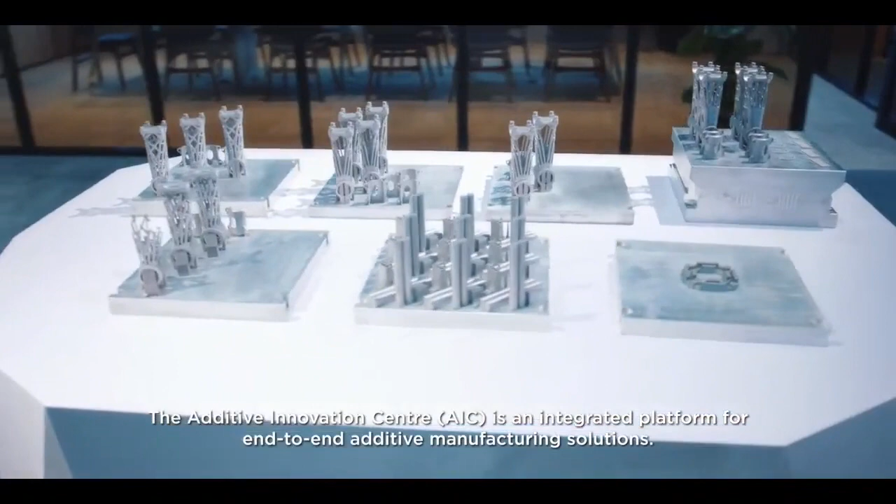The Additive Innovation Center is an integrated platform for end-to-end additive manufacturing solutions. AIC was designed to be the nerve center for additive manufacturing technologies and innovations, allowing industry partners to meet up and brainstorm on problem statements that are unique to their business needs.

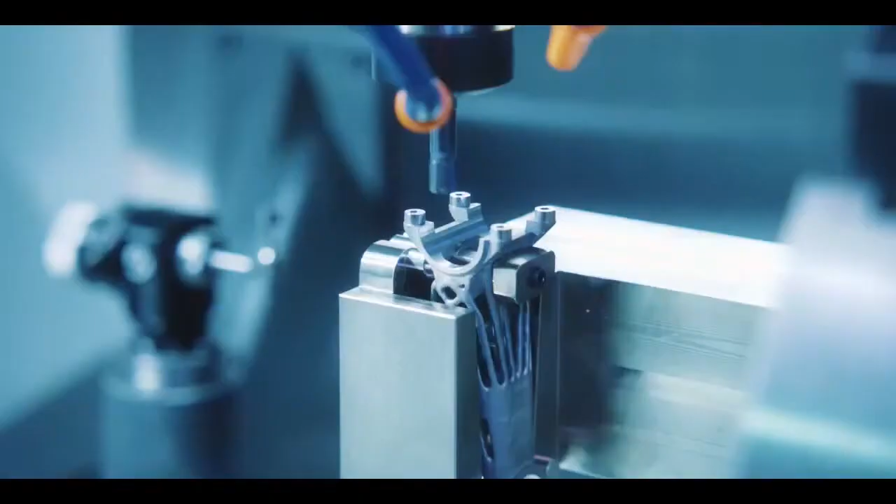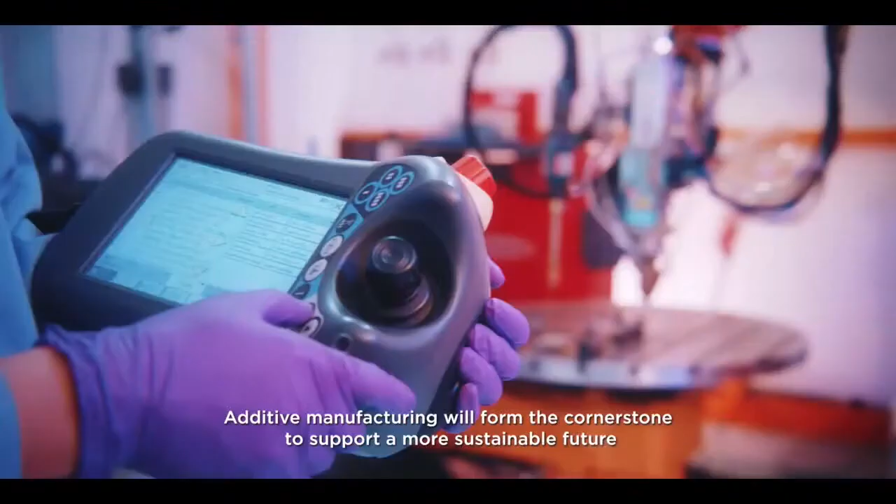One of the top priorities in Singapore's Research, Innovation and Enterprise RIE 2025 plan is scaling up platforms to drive technology transformation and strengthen the innovation capabilities of our enterprises. Additive manufacturing will form the cornerstone to support a more sustainable future through circular design and cradle-to-cradle manufacturing. AIC will serve as a bridge for promising A*STAR research outcomes to be accelerated for industry test bedding and commercial scale-up, drawing on the entire domain expertise from the A*STAR research community.

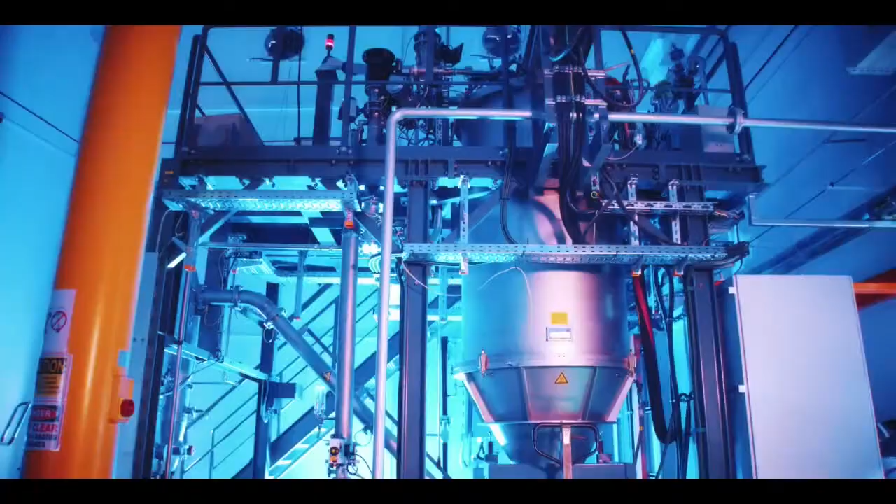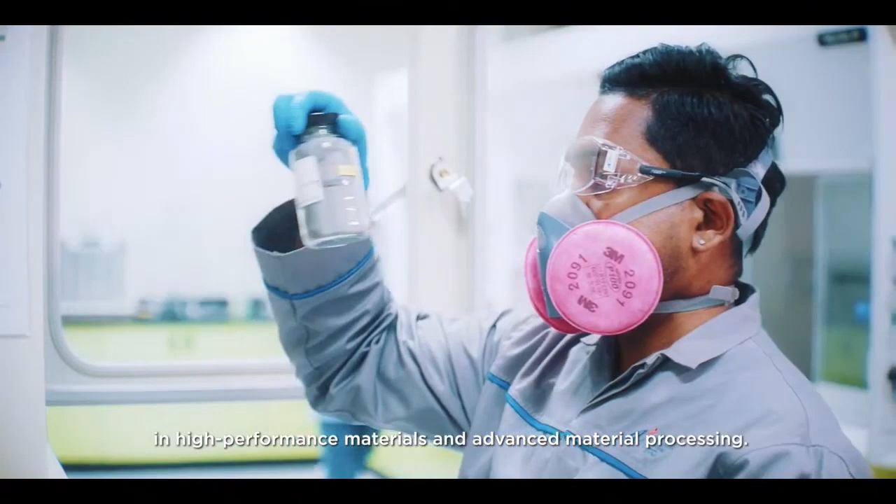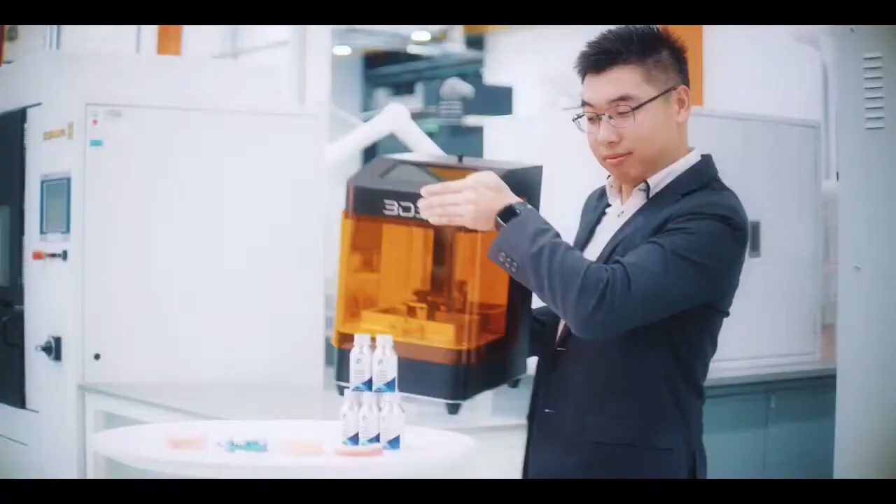Our collaboration with SIMTech and IHPC sparked an organic fusion of each other's technology and know-how in high-performance material and advanced material processing. Together, we could achieve deliverables that exceeded our expectations and maintain high mutual motivation. A*STAR connected us to IMRE's Dr. Wang Fuke and his brilliant invention in 3D printing material technology. It is not easy for commercial companies like us to partner with a research institution because of the vastly different focus and operational methods. Overall, IMRE has been a great partner. The support from them has been amazing.

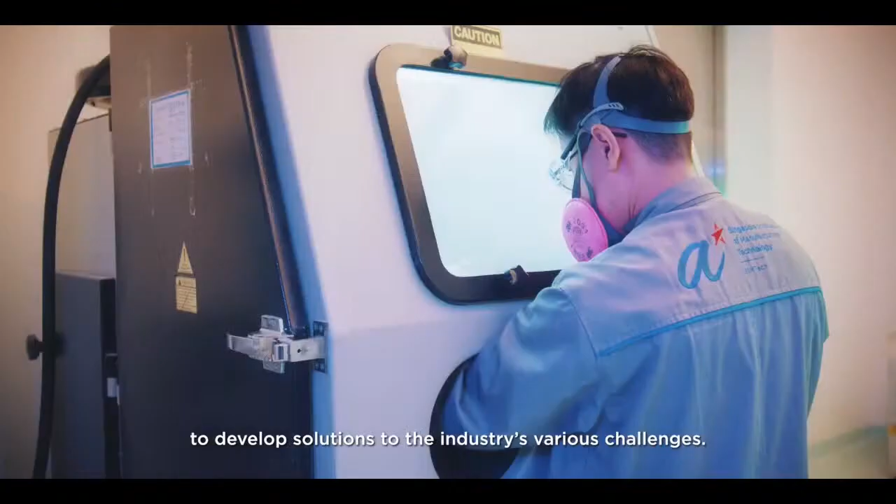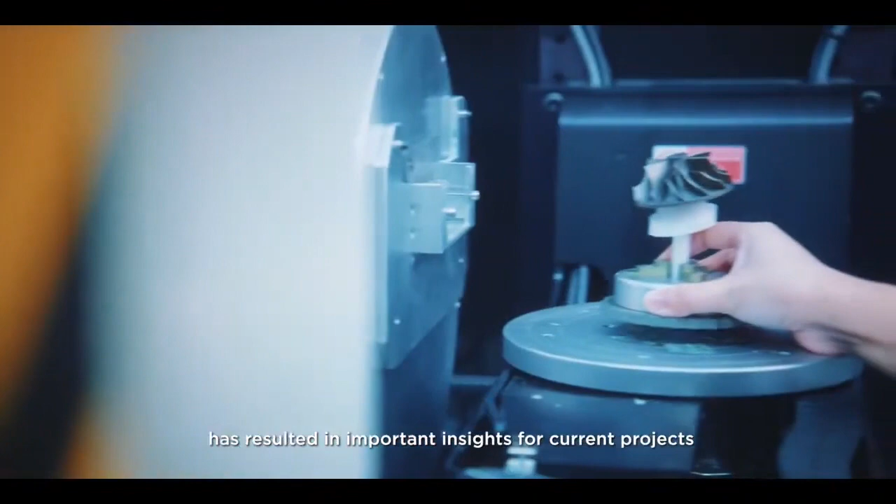ST Engineering's significant engagement with SIMTech and ARTC is to leverage SIMTech and ARTC expertise and extensive resources to develop solutions to the industry's various challenges. Our common interests, trust, and value gained from collaborating with each other, as well as the strong team bonding built over the years. Entegris selected SIMTech as the optimal organization for our applications, which are focused on fundamental process and materials research. SIMTech's solid infrastructure and world-class scientific talent has resulted in important insights for current projects and has created opportunities for us to innovate together in the future.

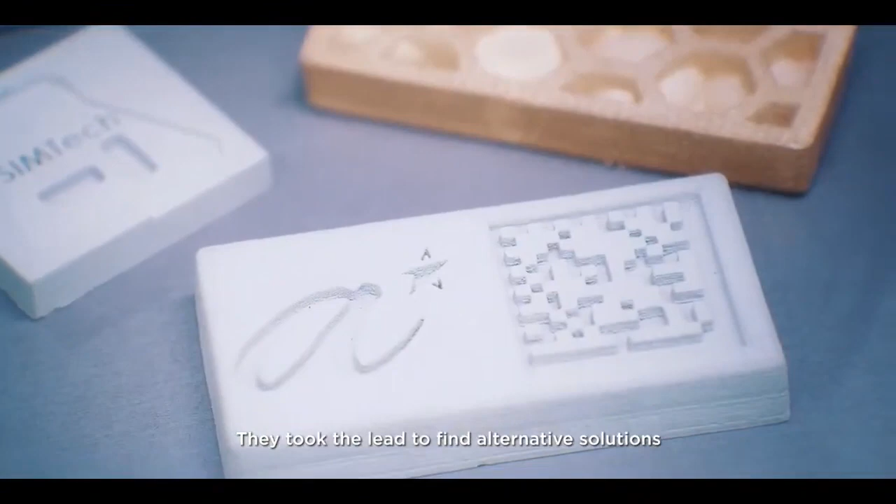They took the lead to find alternative solutions and help to ensure continuous progress of our engagements during the unprecedented COVID crisis. Rolls-Royce has been an anchor member with the ARTC since 2012. Our partnership is based on mutual trust between our two organizations across multiple levels. The wide range of technologies and technical capabilities within ARTC and the wider A-Star community have enabled us to work seamlessly in many cases. With our experienced team of researchers in this field, we believe there will be a lot of value we can create jointly with our companies in this industry. We look forward to forging a stronger and highly impactful ecosystem for the AM industry. Once again, congratulations on the launch.

And now, of course, to further strengthen our capabilities in AM through partnerships, we will now have 3 MOU signings. Now, the first will be between SIA Engineering Company and NAMIC. This partnership aims to build diversity and resilience to SIAEC's supply chain by allowing digitization of spare parts and on-demand additive manufacturing. This will strengthen SIAEC's capability in aircraft cabin maintenance and materials development at industrial standards.

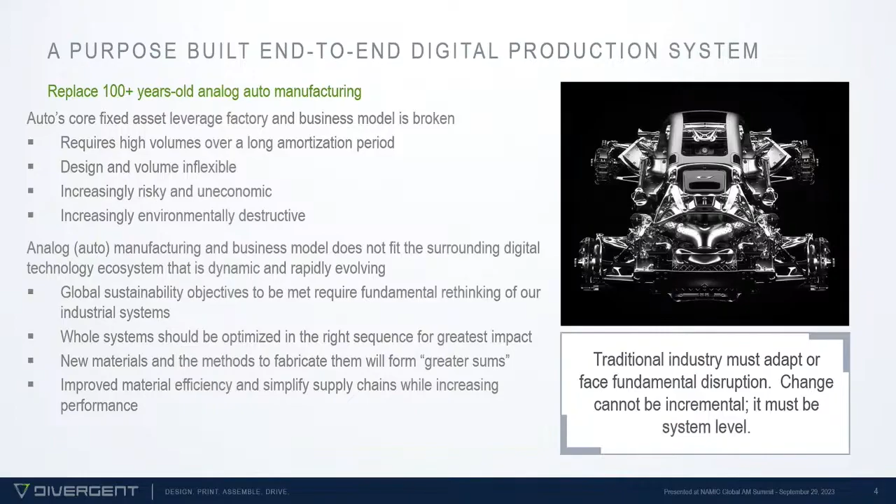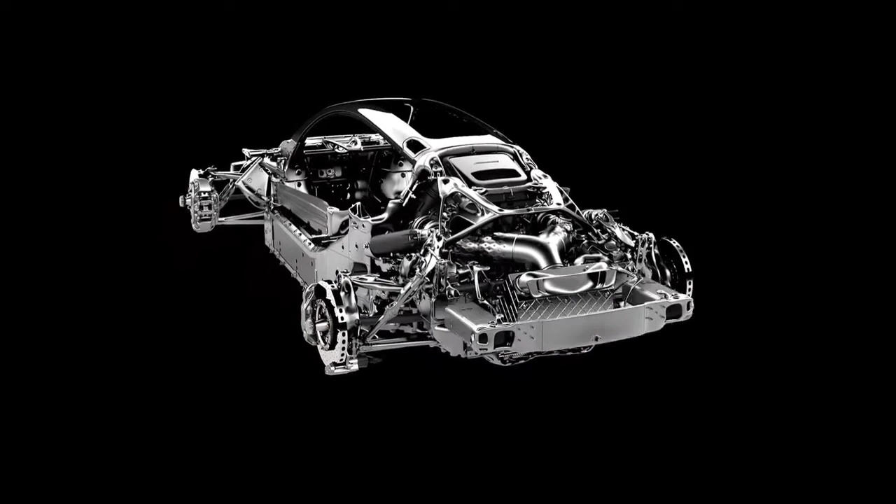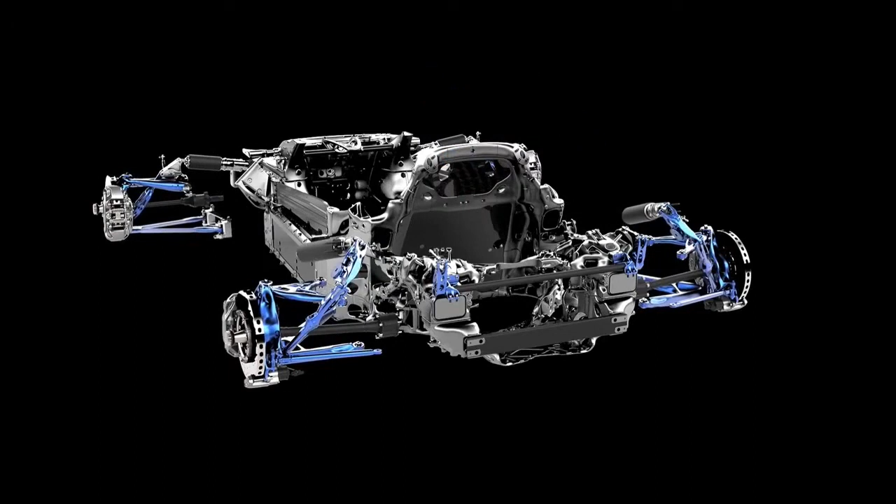So just to walk through the frame of the chassis of our vehicle that we created, you can see how much AM content is in the vehicle. We actually re-engineered virtually every part of the car. So over 400 AM parts are designed into this, mostly printed aluminum. And this leverages our automated assembly technology. So when you see some of the larger structures, what you're seeing there are 30 or 40 additive pieces that are coming together, being adhesive bonded in a robotic cell. And I'll walk you through that here shortly.

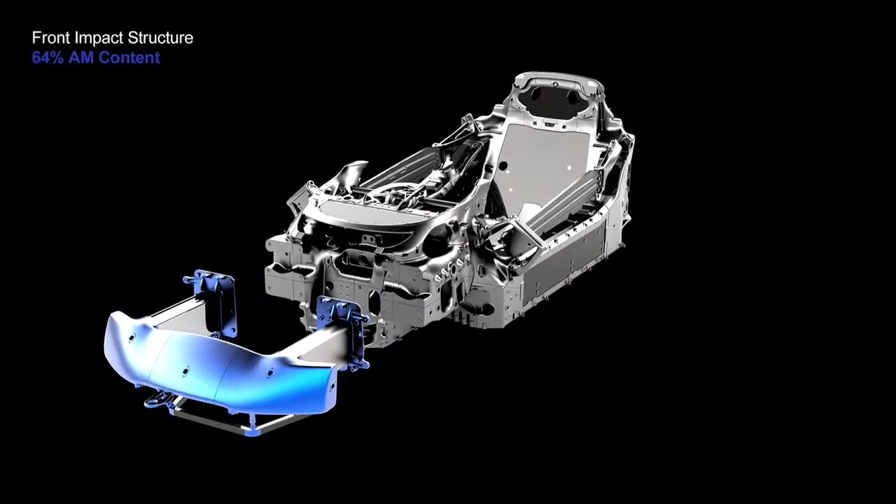So as we kind of fly through the different subsystems of the vehicle, you're seeing the different bumper structures, the front megastructure. We've developed aluminum alloys specifically to solve each of these application use cases within the vehicle to also meet our cost productivity objectives to bring a vehicle to market that actually could be addressable in a broad way in automotive.

So real quickly, design, print, and assemble is the tagline of our company. And within these three verticals, we've actually had to do a tremendous amount of innovation and development. So over 600 patents are represented in the system that you saw. In the design module, we've had to create our own topology optimization software to solve the problems that we're doing. Multi-objective optimization. We don't talk about design for additive manufacturing.

We talk about putting those rules into our optimization tools up front so that we inherently get AM producible structures out of the process. We also design for our automated assembly process, which means that we design and print in the features required for robotic assembly right directly into the structure.

And then we are able to move to our print module where we've actually engineered our own custom open architecture printer. We've prepared our own scan field partitioning algorithms, our software to control the machine itself, the parameters that we're using, the materials that we're using in the printing process. All of this had to be brought together to achieve the cost productivity outcome that we did.

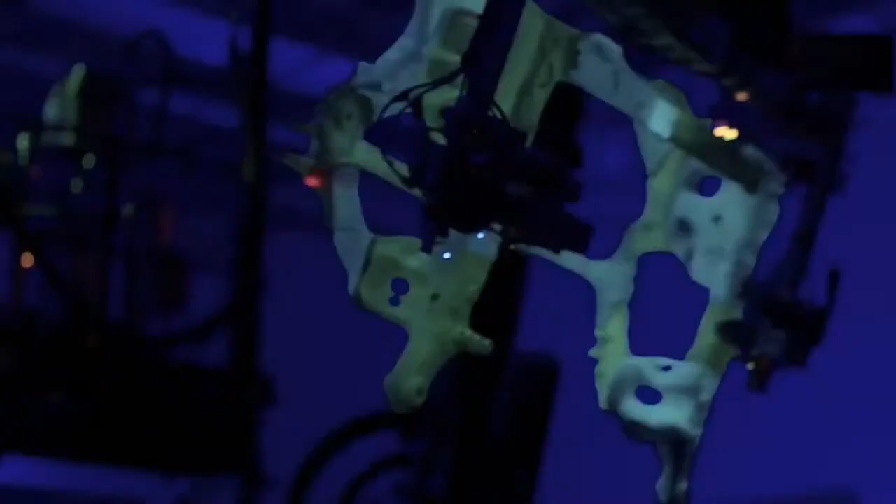So what you're seeing is a 22 robot cell that is assembling, in this case, a 17-piece frame for one of our public customers, Aston Martin. And this goes into the V12 Vantage vehicle. These structures are on the road today. This is fully safety certified, validated by the OEM, printed at a cost that they can absorb into an EF segment vehicle, and then delivered to them and incorporated into their vehicle assembly line.

So most people would not have expected this to have occurred already. There's a lot of small component level activities that are going on, but doing it at a large structural level really hasn't occurred up until pretty much early this year. For the first time, we delivered these and certified this product. So we're printing at industrial rates.

So our perspective on 3D printing is not to attack the precision part of the problem and make these very exquisite heat exchangers or these types of components for manned air flight. We're focused on really maximizing the productivity of a laser powder bed fusion process, and we've achieved print rates between 1 and 3 kilograms per hour in our proprietary aluminum alloys that we developed.

So again, if you had just used a commercial off-the-shelf material and tried to engineer a vehicle with that, you wouldn't have the material requirements that you needed to achieve, you wouldn't have the productivity that you wanted to achieve, and you really wouldn't have a product at the end of it. So you have to take a step back, take a look at the whole system, and then solve each of those pieces to bring it all together and have a comprehensive path forward to what you're trying to achieve.

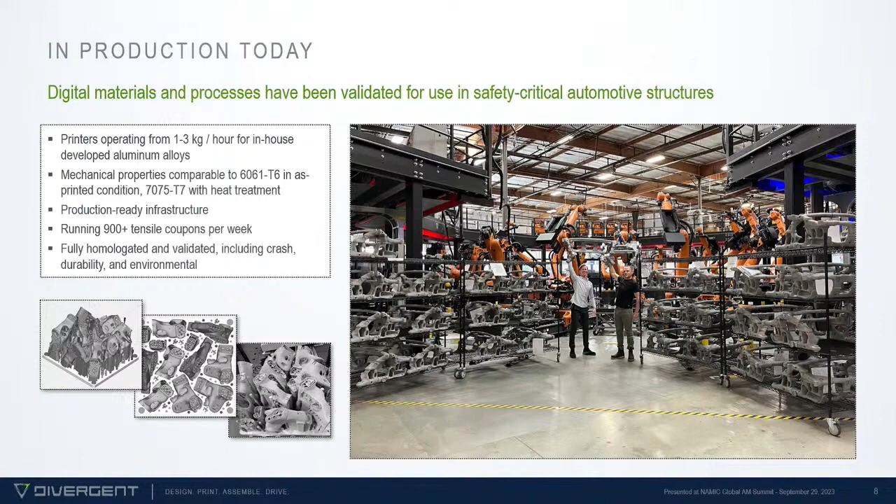As most people are probably aware, we're using the SLM NXG 12 laser machines, but simply going from 4 lasers to 12 lasers, you don't get a 3x improvement or 2x improvement. You actually see something like a 10 to 15x improvement when you put all of these pieces together. You use your own software, you use your own materials, and you have an open architecture solution.

Another case study that I like to present is recently we've kind of moved from our initial automotive focus to drones and aerospace and defense type applications. So this was a part of our public partnership with General Atomics. These are actually their figures, not our analysis. So this is coming directly from the customer feedback. We were able to reduce the part count by a factor of 45.

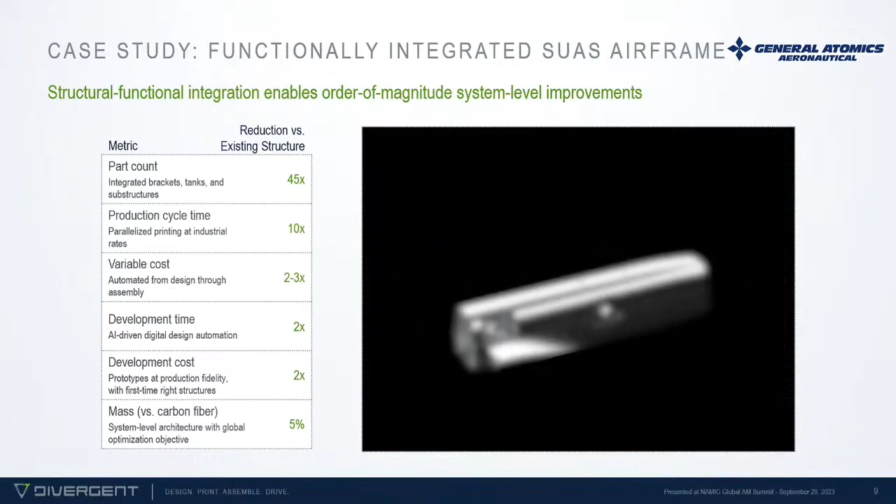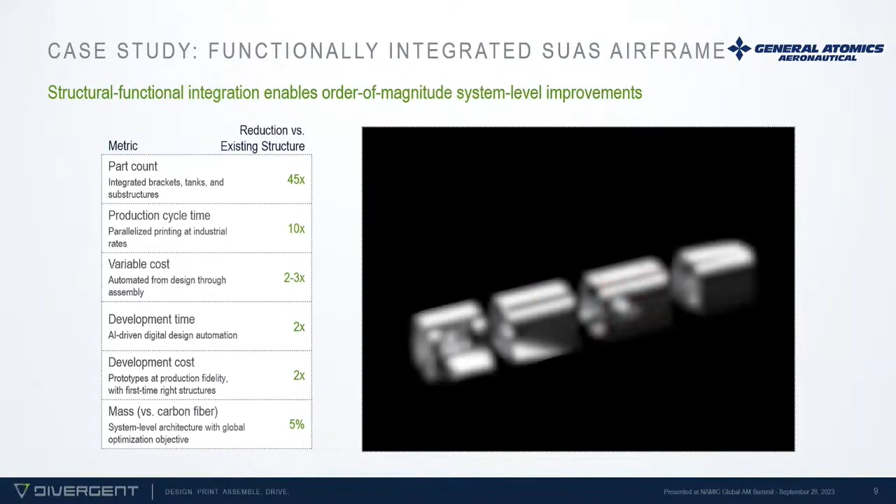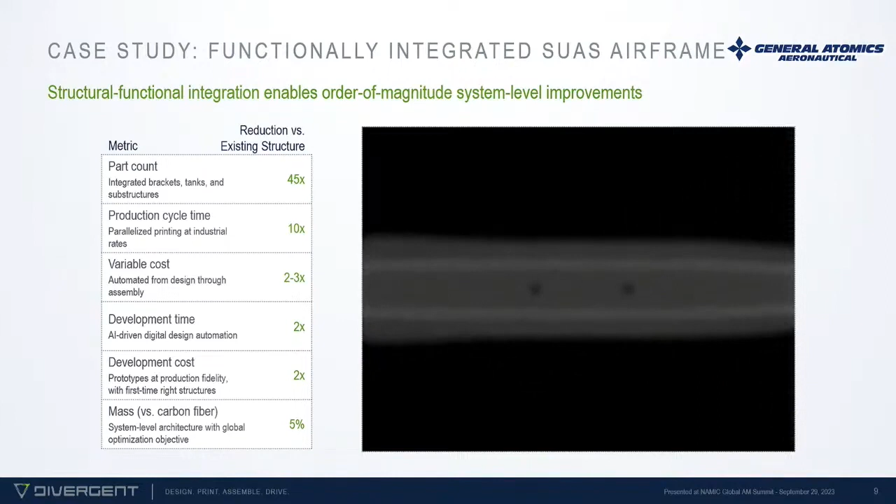What we did was we basically integrated the entire fuselage of this small drone structure into 4 printed components that we then automatically assemble. So it's blurred out for ITAR reasons and data security reasons. But what we've done is we've integrated all the avionics mounting, all of the harness lines, all of the air ducting, the fuel tanks, the wing sweep mechanism, the strong back, the engine mounting, and really put all those pieces together into a design that's actually lower cost, lighter weight versus a carbon fiber baseline. We can produce a drone a day with just 2 printers.

Our average prints at Divergent are less than 24 hours long for roughly 30 kilograms mass per day, per print job. So with just a small investment, we're able to crank out 1 drone a day. So you can imagine, this sort of scalable and modular solution is really what will be able to have a high impact and deliver on the key themes coming out of the Department of Defense in the U.S.: contested logistics, surge capacity, the ability to have fungible capacity, and a 3D printing architecture that can actually automatically assemble anything with no tool changes is really what they're looking for.

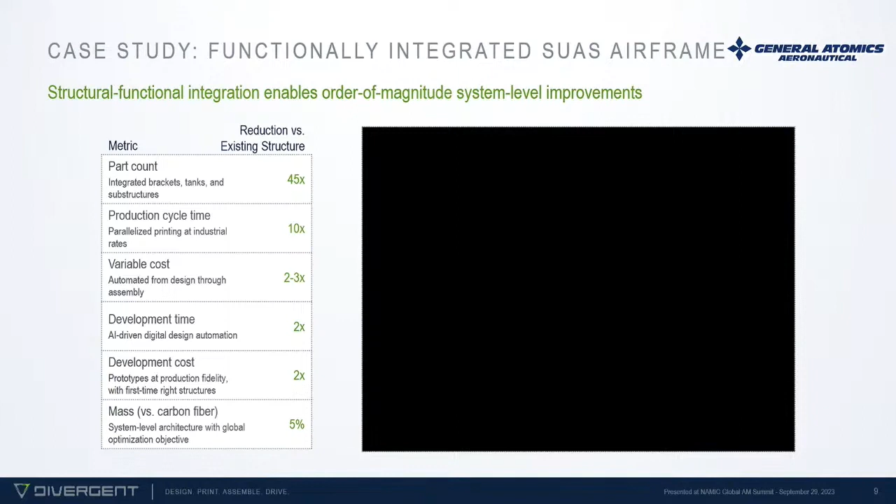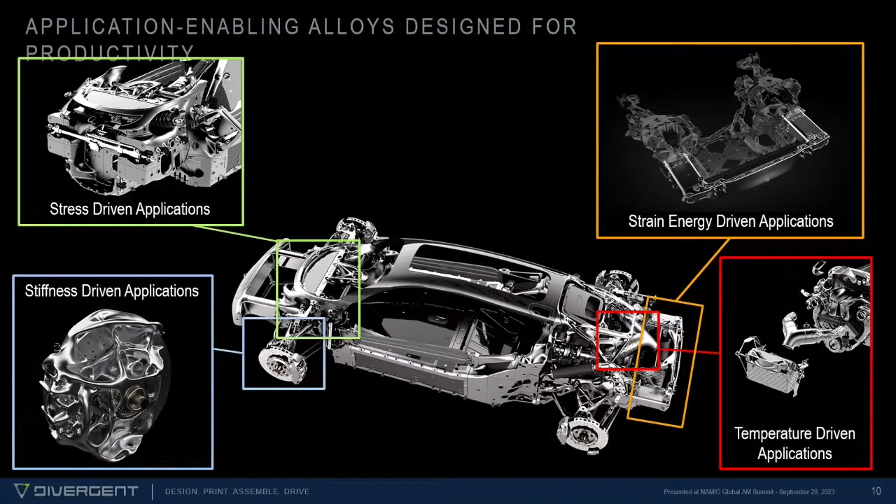So a little bit more about our materials development. When we looked at the overall vehicle, we really see 4 primary applications in automotive. And as I mentioned earlier, we really had to go back to the beginning and say, hey, these materials that we're using really came from a different industry. They came from casting, they came from forging industries, and then we're trying to 3D print with these alloys. This is fundamentally the wrong approach. We need to design alloys that meet our application requirements, that are suited to the process that we're using, and can meet our cost objectives.

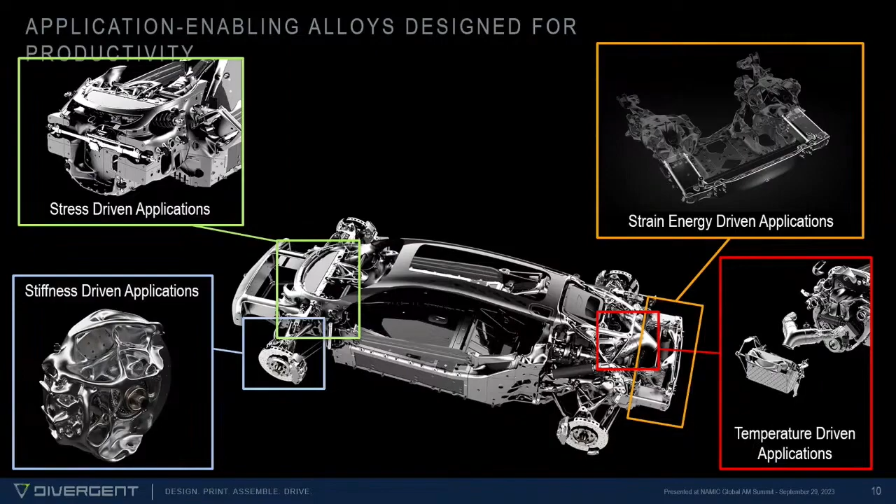So designing an alloy that has incredibly high cost additives in it, like scandium, is fundamentally not the approach we're interested in. Yes, you can achieve great properties, but you really can't ever get yourself into an application and drive change in a meaningful way. So we focused on these problems, and we've actually come up with what we call a multifunctional alloy. Using the exact same powder, we're able to achieve 3 very different property objectives. And this greatly simplifies what we're doing in our production factories. We can run one powder and serve a wide array of production opportunities. And that lends to the global networked and fungible capacity theme that I was talking about earlier.

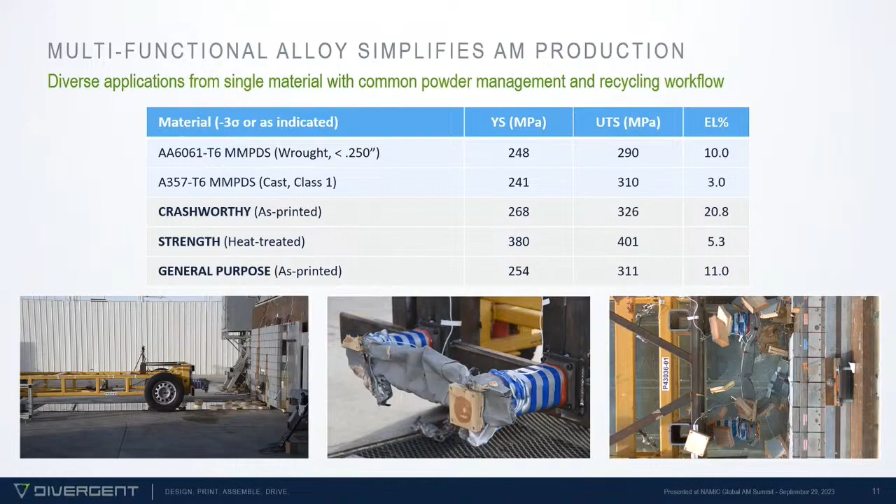So there's a lot of opportunity if you take that system level approach that can be exploited. As you're thinking about all of your different applications, I'd encourage everyone to not focus on just one element of the system, but make sure we're optimizing at a system level to have the greatest impact. And doing those optimizations in the correct sequence will also help you.

So when we think about our cost structure, by taking the system level approach, we've gone from a state where AM is considered this incredibly exquisite high cost process to one where today it's already competitive with E and F segment automotive needs. We're able to compete directly head to head on cost with a conventionally fabricated cast extrusion based assembly from customers like Aston Martin and Mercedes-AMG, and deliver them a lower cost product that has higher performance and better quality.

This is really a testament to, I think, the approach we've taken from the very beginning. As a startup company, it's really difficult to take this kind of approach and convince your investors that you're taking the right approach, because they see it as too complex. You're working on too many things at once, and they see that as a risk to success. And I think a lot of that thinking is actually what's held us back as an industry from having the impact we want. So we have a lot of people working on small pieces of the AM problem, and not a lot of people putting all of the pieces together to deliver a holistic solution.

I would encourage bodies like this one and this AM ecosystem to tackle the problem more holistically and less narrow-focused, because I think ultimately that generates a lot of the confusion in our customer base about what AM can actually accomplish for them, when they see so many conflicting perspectives about whether the technology can really be production relevant anytime soon. The answer is yes, we're already in production applications and on the road.

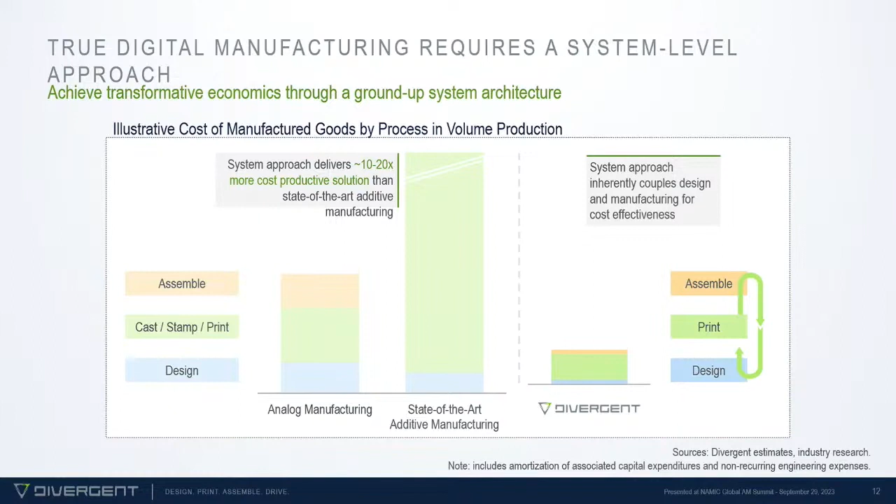So our vision for our factory is really to deploy this regionally. We can position this in many different sites around the globe. Right now, with our automotive initial focus, we're going to put that first factory in the EU and support our automotive customers there. We have a lot of growing interest from the aerospace and defense sector in the US, so we'll likely have a second facility there. But the vision is really to expand this globally and create this network of facilities all over the planet that can be networked and provide that fungible capacity.

So we can truly enable a digital manufacturing approach where we're not constrained geographically to a casting foundry that may be located in one location. We have incredible supply chain freedom in that we're really just using machines and powders and any associated post-processing requirements we have, like our adhesives.

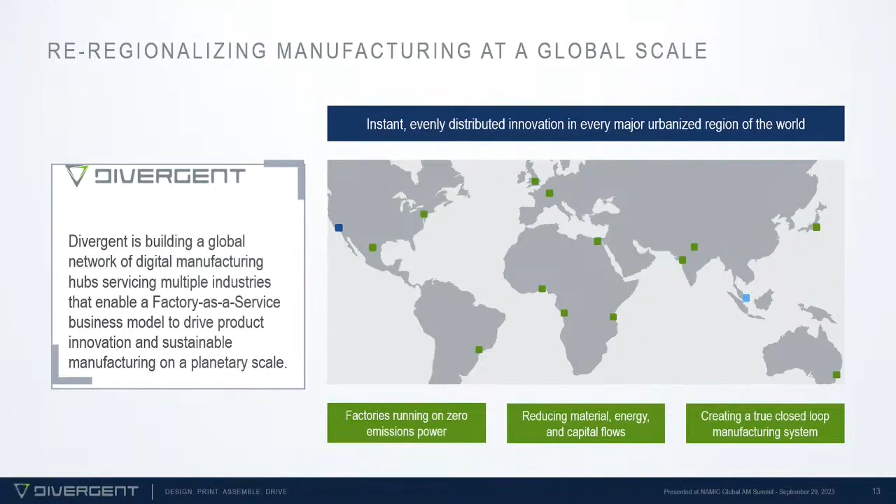And that will really change the dynamics of manufacturing and revitalize what we're trying to do, by having, you see so many examples, especially in the US, where the steel belt, or now the rust belt, was completely devastated by the movement of those industries to other lower cost countries. What we're envisioning is really revitalizing those locations with a permanent manufacturing capability that will be locally recycling materials and creating ever more optimized and higher performing structures locally.

So how will we do this? We see a really strong analogy in the CNC industry. There was a key transition where CNC went from being a hobbyist tool that really only existed in universities, and they were incredibly expensive, to now you can go buy a kit and make your own CNC machine for about $100 to $200 off Amazon, which is a really incredible transition.

I see a very similar transition happening for AM, perhaps not quite as dramatic, but with relatively low cost and high productivity systems, the whole industry will be able to change and adapt to additive manufacturing as the key mechanism for delivering lighter weight structures, dematerializing our world instead of having so much excess mass that's fundamentally not needed because of legacy manufacturing processes. We can create a new dynamic where the focus is on dematerializing our structures, maximizing the optimization opportunities in front of us, and delivering products that fundamentally couldn't even exist previously.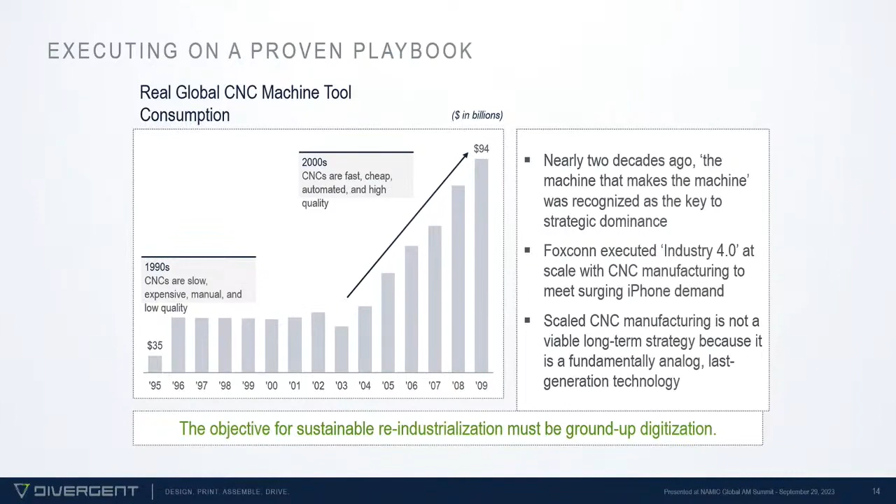One of the things I lead at Divergent is our LCA analysis that we do for sustainability of our system. We really are working across every aspect of our manufacturing process to understand exactly where the energy is going, how we can optimize that, and build a roadmap around it to look at different types of laser energy input, different types of material, powder sizes, how we can get the powder to absorb the energy more efficiently, and managing our other utilities throughout the facility to accomplish a more efficient AM process.

When you're able to take a baseline structure that maybe weighs 30 kilograms in a traditionally fabricated way and take 20% of that mass out, even if your process is a little bit more energy intensive, we've always seen a net benefit from a sustainability perspective in those larger AM structures. This is not something where if you look at a component by component level, you really have to struggle to find those cases where AM can win on a single component basis. But if you take that system level approach, we've consistently found that it always can win if you deliver a system benefit on the order of 15 to 20%.

I talked a little earlier about our vision of cycling materials, of creating regional manufacturing hubs that are able to take the previous generation of structures, and with everything we've learned from how those systems have operated out in the field, we're collecting that data, building better software, building better printers, building better materials, and recycling those materials back into the process. We can use primarily secondary materials rather than continuing to exploit and mine primary materials. We'll be able to do more with much less in the next stage.

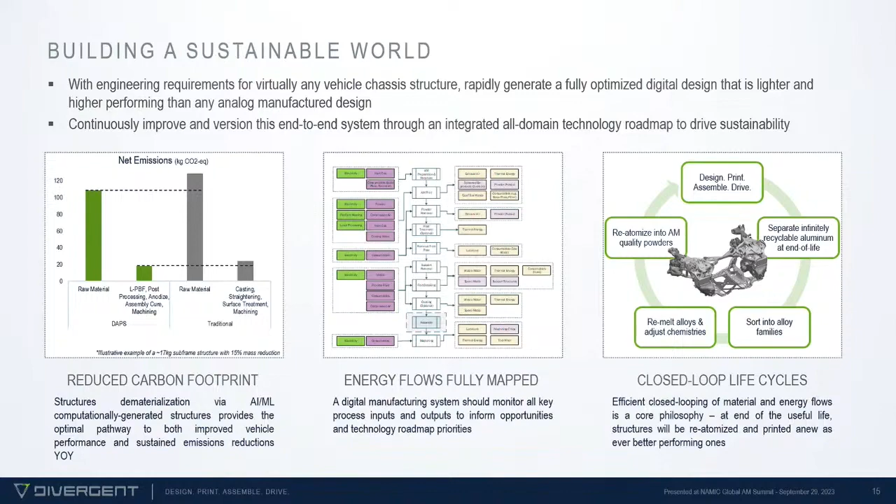Thank you, Michael, for the presentation. Thank you.

It was indeed a very stimulating keynote. Why do I say stimulating? I don't know about the rest of you, but I woke up at the rev of the engine.